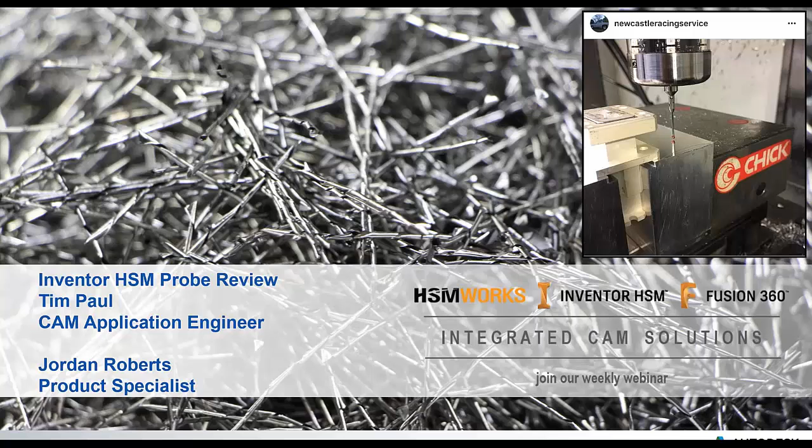We're going to be covering the Renishaw probe inside of HSM technology.

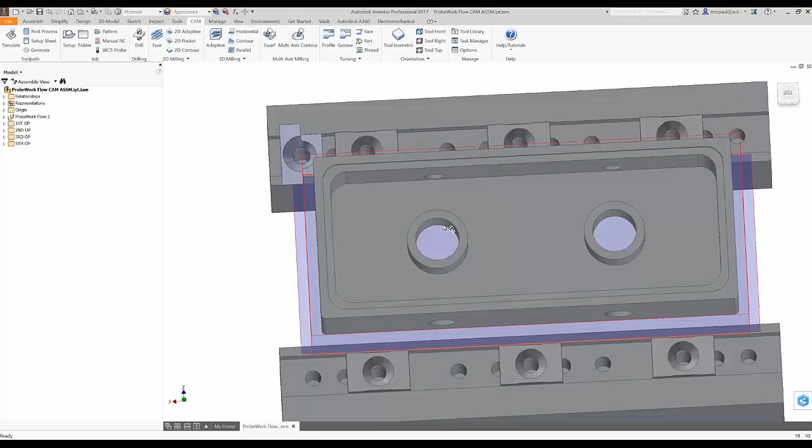So what we have here is some Mitee-Bite Talon vices that are going to hold it for a first operation. And then we're going to machine it from this perspective. And these through holes here have a pretty tight tolerance. You can fill in the blank for the tolerance for what is tight to you. Let's say we had a plus or minus 1 tolerance here, but the outside of the housing has something like a plus or minus 10 thousandths.

My hope today is really kind of just show you a workflow, not really tell you how to make parts, but share a workflow that I've used successfully. Hopefully you'll get 1 or 2 things out of this.

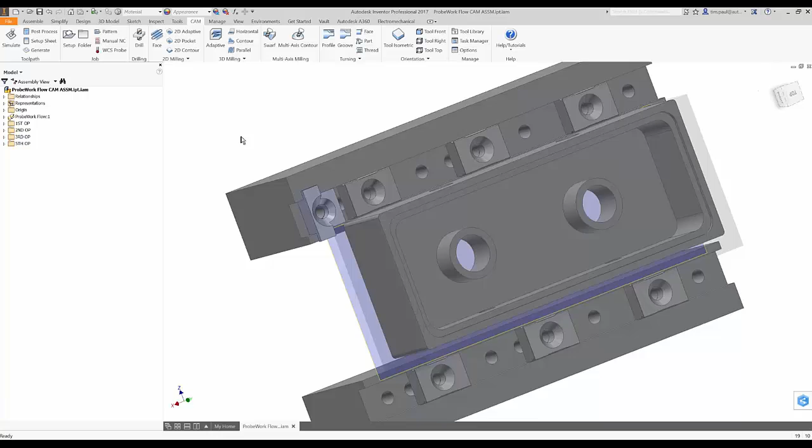So if we looked at this part and said the outside of the housing could have a plus or minus 10 or 20 or whatever you would consider a loose tolerance, I see a lot of people spend a lot of time keeping the outside of a housing like this super tight tolerance, because they know that's how they're going to index the part through the rest of the machining process. Because let's say these side holes had a super tight tolerance to the sides here or something like that. So I'll walk you through that, but then we're going to flip-flop the part around and show you how we do some of the probing.

So let's get back over to this CAM space. And actually I'm going to turn off the visibility on the model. So what I did here in the model space is I just have some fixtures that I can turn the visibility off for this whole folder and turn it on for another operation. So I'm not here to show you about the CAD, but in Inventor, this is something I use pretty often, is I'll turn on the visibility of one setup, turn it off for another. Some people will model up their whole table or whole vise, which is great. My focus is just to get a good representation of what I'm worried about touching.

So let's go over to our first operation. So I pre-programmed this, and we're going to go through a new setup for the first operation. I'll show you what we did inside this operation and how to work through it, and then we'll go from there. So we're going to make this our default folder. So if you don't know how to do that with your keyboard, you'd hit Shift D to make this our active folder.

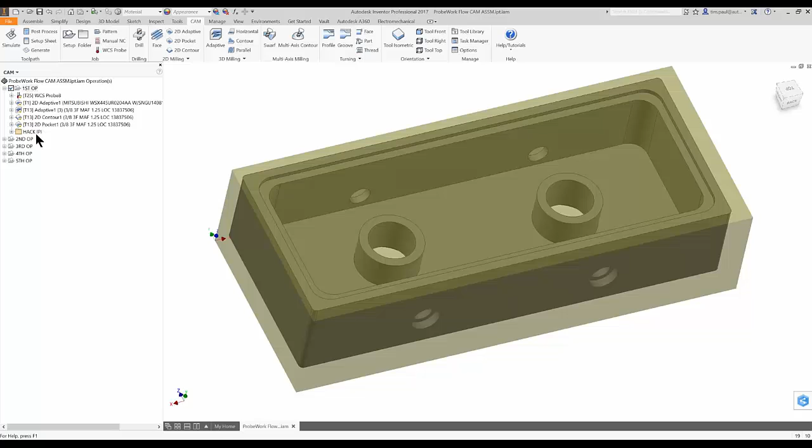So let's actually start off with a new setup. So what we're going to do is we're going to replicate this setup here, which is going to start with a probe of the X and Y, and then kind of work through some toolpaths. So for now, let's just do a new setup. So we have a new setup here. First thing I would do, knowing there's a bunch of hidden assemblies, I want to make sure that the only thing I'm grabbing is just the part I want to machine. So I'm going to clear the selection and reselect the model.

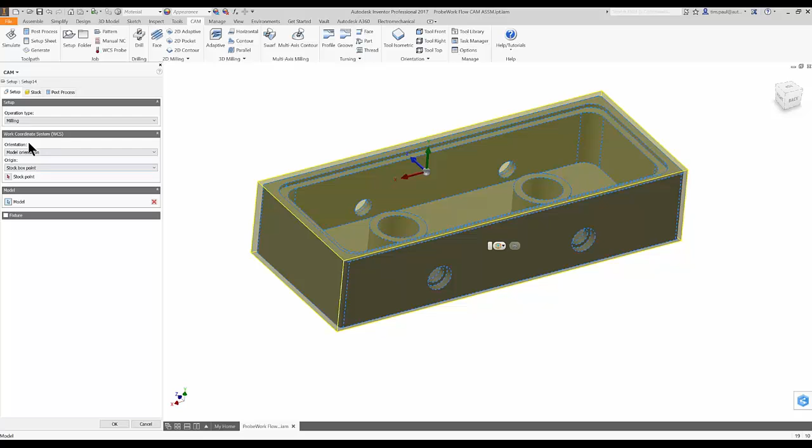Normally from here I would set up my work coordinate system, but for this I already have a solid set up for my stock. I'll explain why in a minute. But I'm going to jump back over to model. I'm going to open my first operation folder and grab the stock from there. So now we'll go back to the CAM, and now it's time to set up our work coordinate system.

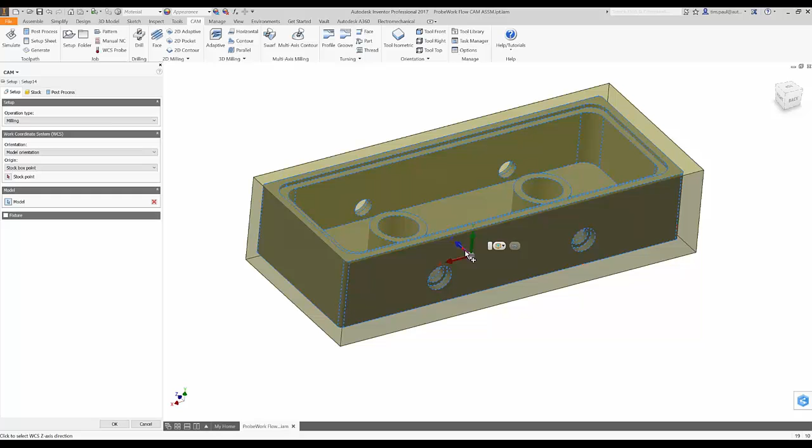So what I'm going to do is I'm going to grab the stem of the z-axis. I'm going to make it normal to one of the Z surfaces. And then my work coordinate system is going to be down in this lower left corner, so I want to click on the X there and flip it around. So now I want to move it, so I'm going to hover over the little ball here and just click it right there. So we're almost done with the setup.

So now we want to go to the Post tab. This is where I would give it a program number, and this is where I would call it something like first op. So today we're going to be talking about just probing with work coordinate system shifting. So for now we're going to leave the work coordinate offset and the override the same. If we have time later, we can talk about how you might use this, but this also might be changing. So for the most part, you're going to leave these the same.

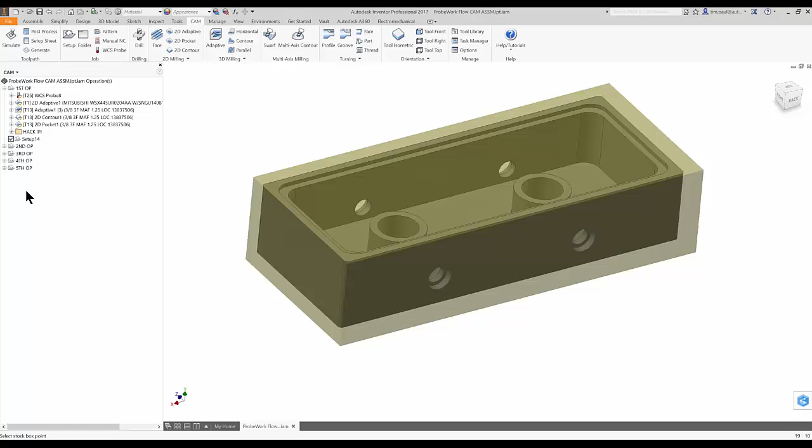So our job's ready to set up. Let's just drag this down so we can work on it down there. So the first thing we did here was do the probe there and there. So what I want to do is go back to the model space and turn on this folder, the visibility of all the parts. Sorry. So we can come back over to the CAM tab.

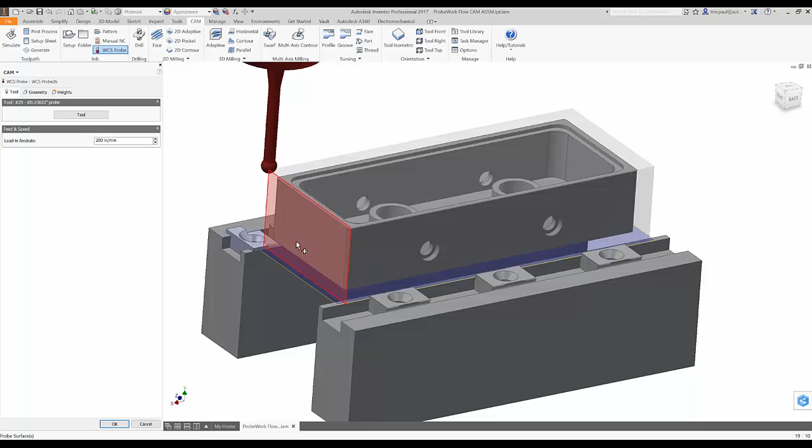So the first thing I want to do is an X and Y, what I call a web probe. So I'm going to right click here and go New Operation, Probing, and Work Coordinate System Probe. So we could definitely pick different surfaces, but we could also just pick the top surface of our stock, and it'll automatically probe basically a boss or a square boss or an X and Y web.

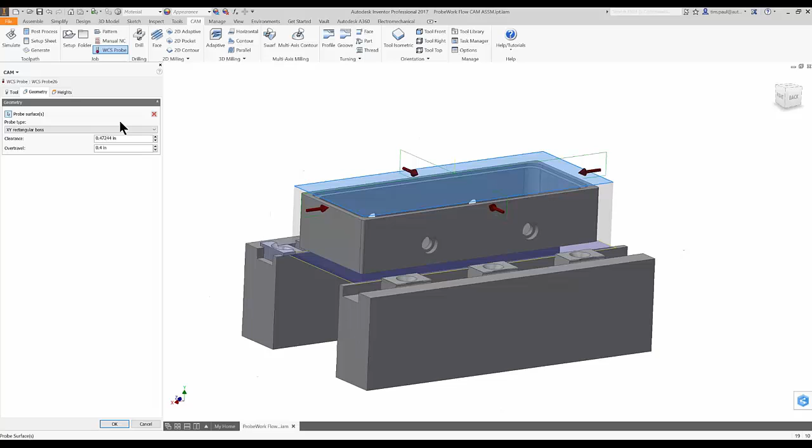So the first thing I see here that I don't like is that my rapid down to plane is pretty low. And a good habit, in my opinion, is that your clearance height, which is the height that it rapids to before it turns on what I call a safe move, I think Renishaw calls it protected positioning or something like that, I like to set this to something that's bigger than my probe height. So now everything below this height is going to be in a safe move.

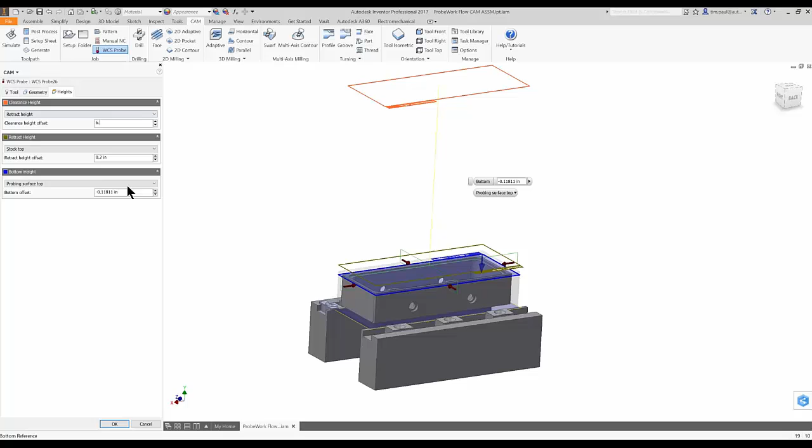So anything that touches the stylus, if it's not anticipated, so if I had a big bolt up here and it came down and touched it, as long as it touched the stylus and triggered the probe, it would stop safely. So we can just drag around the bottom height. So let's say we wanted to probe our stock in the middle instead of up at the top. We can do that. So that's our first probe location right there.

So what that's going to do is if I cut my stock a little bit bigger than what my intention was, if I left the work coordinate system located there, instead of machining around it and having a heavy cut over here and a normal or light cut over here, this is going to shift it. It's not going to move my work coordinate system, but it's going to shift it. So if I had 100 thou extra material there, or 10 thou, it's going to take half of it and shift it over, so you're going to have an even cut on both sides.

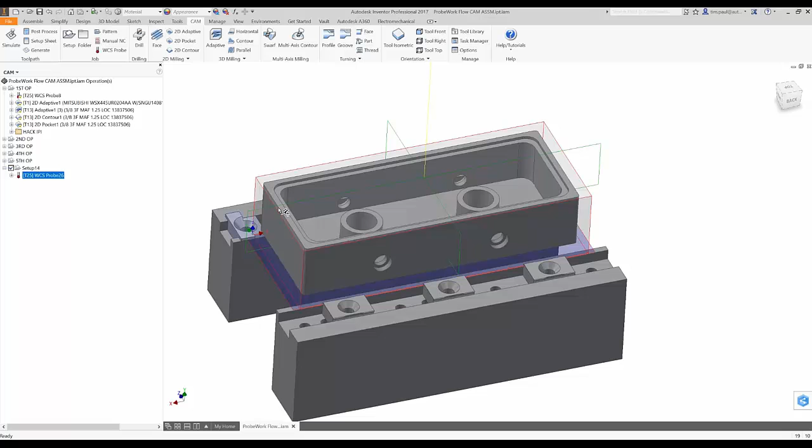Okay, so then the next thing I did was an adaptive facing operation there. We did a 3D adaptive to machine the inside and outside for rough. And then we finished these pockets and finished the outside with a 2D contour. And then we finished the walls and floors of these pockets, finished the tops of these resonator tubes. And then also, if you look, I finished the top of the part.

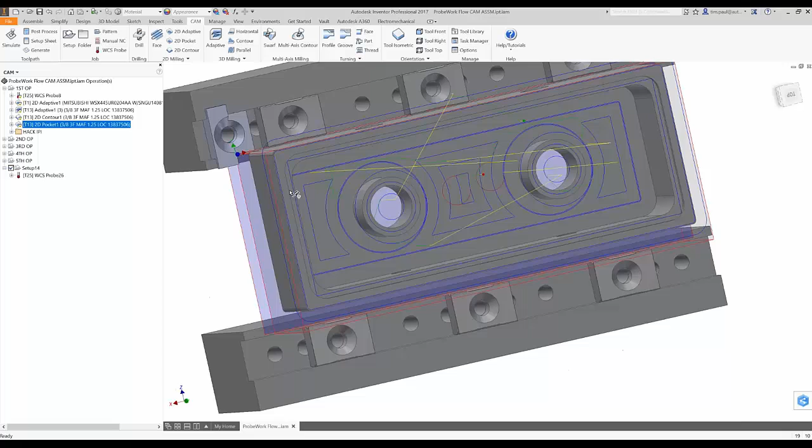Now the reason I did that with the same tool is I didn't leave a stock to leave on this toolpath. And I finished the top here because I know later these holes here have a very tight positional tolerance to this floor. But I can't probe that floor from this angle, but I can probe this surface here. So if I machine this floor and this top shelf with the same tool, I'll be able to pretty accurately locate those holes in that direction there.

So the first operation is done. We can copy these toolpaths and dump them in here if we wanted. You guys don't need me to show you toolpaths by this point. There's this hack folder here. If we have time at the end, I'm gonna show you some cool stuff that are kind of hacks for now, but they're still a pretty good workflow that I've used for years. So that pretty much summarizes the first operation. So that's how you would use a stock.

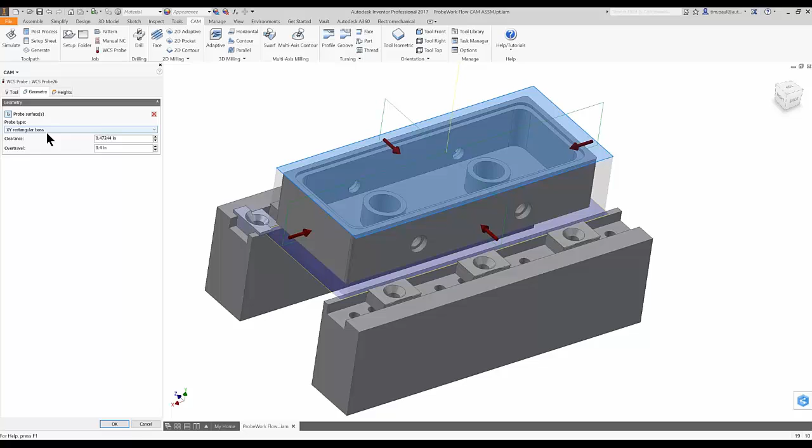Something that's important to note in our development builds. I'm going to write down to talk about development builds when we're done, because we just released a development build that in beta mode will have some stock probing functionality. It's still in beta, so it actually has a couple bugs to work out, but keep an eye on probing. In your options, you'll be able to do a stock probing. Okay, so let's move on. I'm going to delete this folder here.

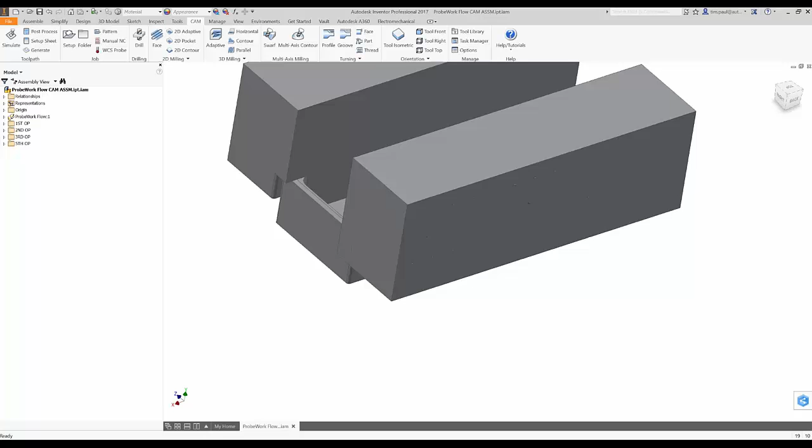Okay, so we're going to move on to the second operation. So I'm going to go to the Model tab and hide the, I'm not sure what I clicked there. Okay, get a little jumpy, so I'm going to hide the visibility of this. I'm going to show the visibility of my second operation, jaws. So this is my work setup for the second operation.

So the important thing to notice is on that first operation, I never really moved that G54 location. When I managed the L3 shop, Andy and I always had this one vise set up with those jaws on there. We had a quick lock so we could change the vises, but when the talons were on there, G54 never moved. I never reprobed it. I just kind of moved it around the way I just showed you.

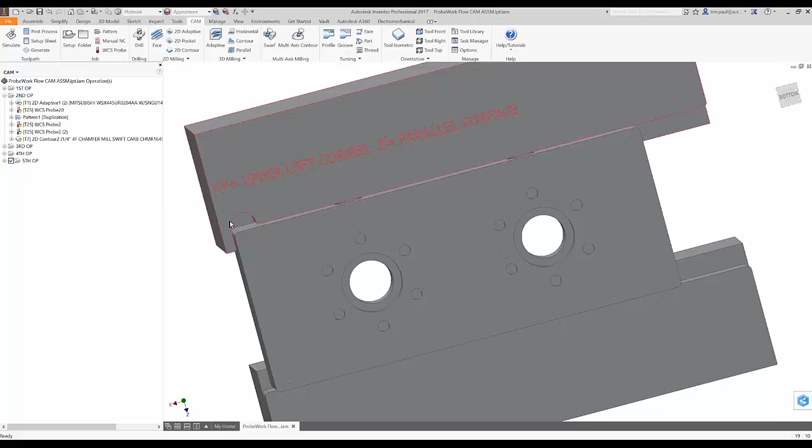But on my second job, or my second vise, I've got these jaws. So if you can see by my note, my XY0 is going to be on this surface here, and it's going to be against the stop. And then my Z surface is going to be on that parallel surface that indexes the part. So by doing that, we can finish the other 4 operations on this part without having to do a manual work coordinate setup each time.

So I put the jaws in, and on a Haas machine, I would use WIPS or whatever, however you locate your part. I would set up my work coordinate system to be that upper left corner, and I wouldn't change it for the rest of my programming. So if you click on the setup, you can see I have that work coordinate system there. But to get into the machining side of this, first thing I'd do is a facing operation there.

And then my engineer was rushed, so he didn't have much time to put much thought into the GD&T, so he made this counterbore some kind of ridiculous tolerance to the center of this through hole. And if you look at the first operation, I probably should have simulated it, but I'll simulate it in a little bit. This through hole I machined really just a little bit past this surface. So this hole wasn't exposed until I faced off that top carrier material. So now that this through hole is exposed, now I want to come in and probe it.

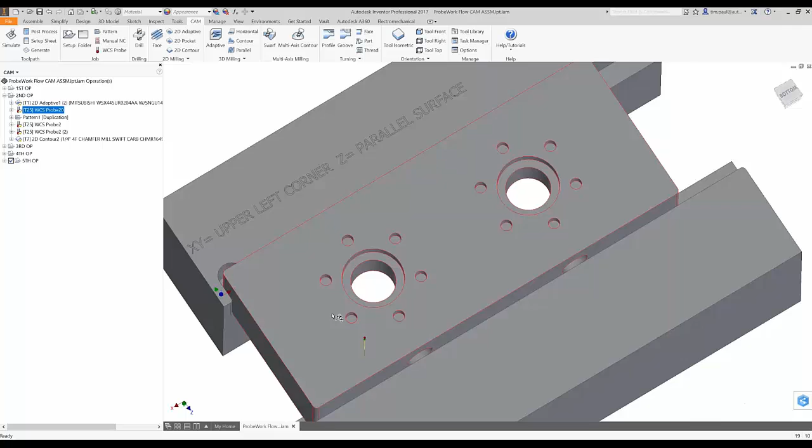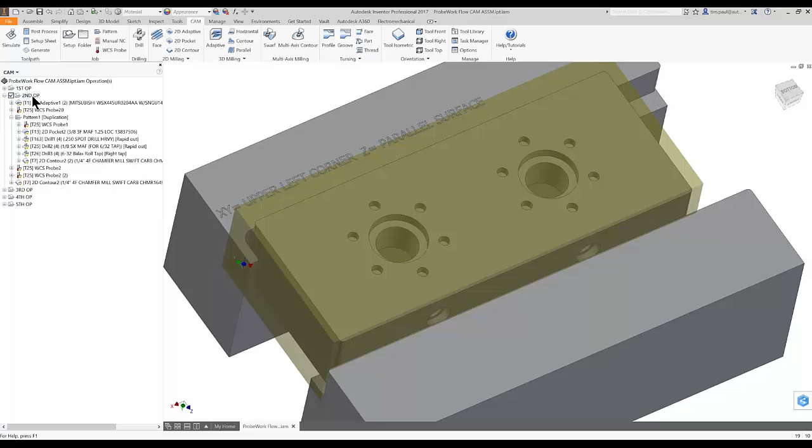Here, the first thing I do is a Z probe because the Z depth of this pocket is super important. So the next thing I did was probe that hole. So let's show you how I would Z probe this. So I'm going to switch over to make this my default folder. So I left click it, hold Shift and D. So now anything I add is going to add to the second operation.

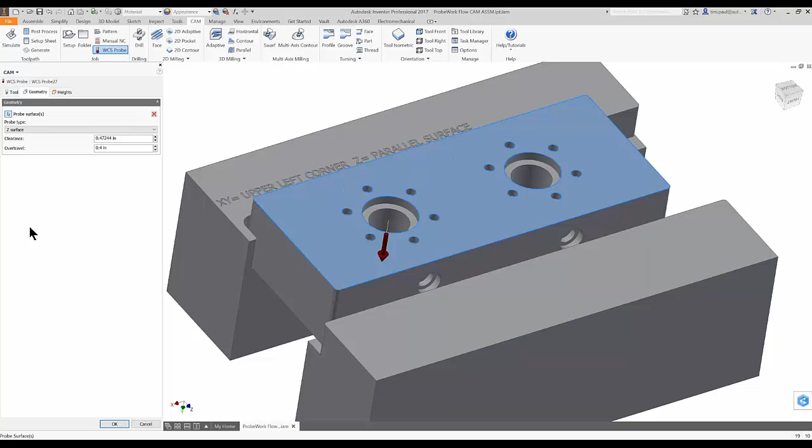I'll show you how easy it is to add a Z probe. So we'll just go here, click that top surface, and it'll probe right here. In the future, there'll probably be functionality to drag that around or add multiple Z strike locations. But for now, it's just going to put it in a good spot. So that's how I'd set up the Z probe. So we'll delete that because it's already done.

But then the next thing I need to do is shift my coordinate to where I'm definitely cutting concentric to this. So this talks about our outside housing tolerance again. So again, the print says the engineer had some foresight and gave me a big tolerance for the outside because he doesn't really care about the outside. He just cares about all the guts. So what he really cares about is that this counterbore is super concentric to this through hole.

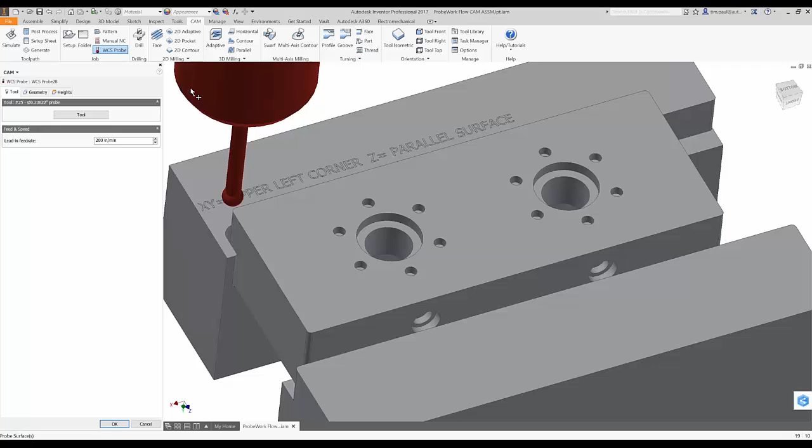So knowing that and the way he dimensioned it, I'm going to come in here, I'm going to machine it off and expose that hole, and I'm going to do a bore probe. So I'll show you how to do that now. So we'll right click here, new operation, and probing. Now, these are also available up here. I've got a habit of doing everything through the right click menu. So it'll automatically grab my probe because that was the last thing, and it might actually grab it just because it's a probing operation.

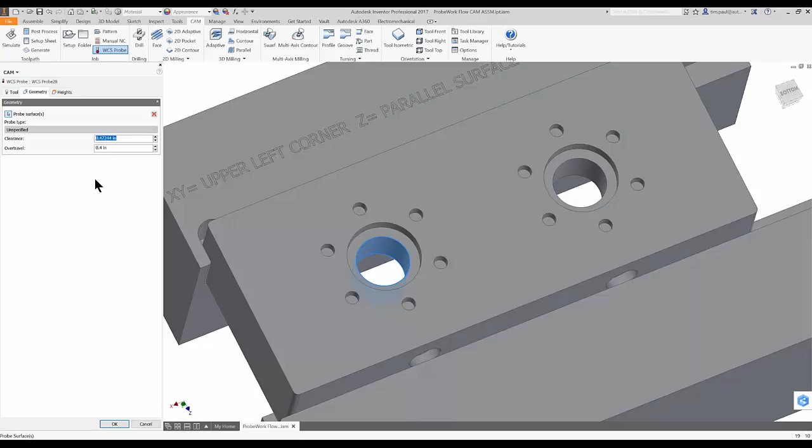So the next thing I do is grab that geometry, and you can see how you don't get a preview of any toolpath. So the reason for that is this hole, I believe, is about a ½ inch. My probe is 236 thousandths. So my clearance, which is the clearance between the probe and the wall, if you add the clearance and the probe up, it just can't fit in there, so it doesn't give you a probe preview.

So if I make that something smaller, say 100 thousandths, you can see it gives you a preview. It actually gives you a preview to also avoid an island. So if we go to this probe type, it gives you different options that you have based on the input that you've given it. So let's do a XY circular hole, because we're not trying to avoid an island. It can go in there and just bang around.

So the overtravel distance, I'm going to give you a resource here in a few minutes about where you can learn more about what all these features do from the Renishaw manual. But for right now, the overtravel distance is the distance it's willing to go past what it thinks that hole size is. So 400 thousandths is quite a bit, but that's a general Renishaw default, I believe. It's right around 10 millimeters.

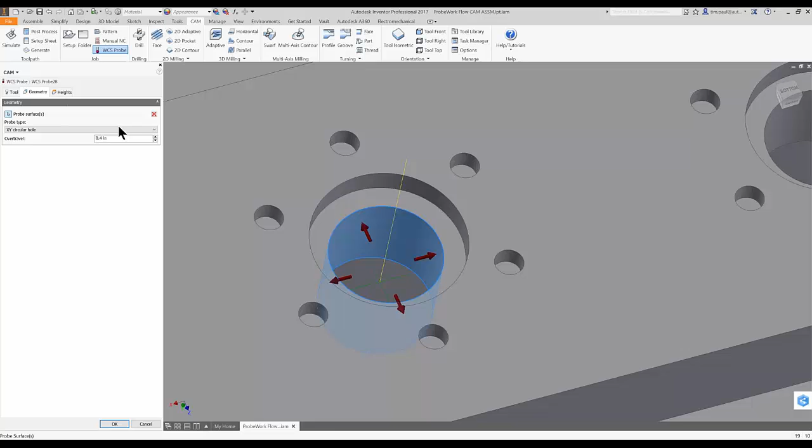So for now, we have that, and we can definitely go in and change the heights to probe at a different location. So again, this top height is where you start moving in a safe mode. And then the other important height is the bottom height, and that's where the strike point's going to be. So we'll hit OK. So now you have a bore probe.

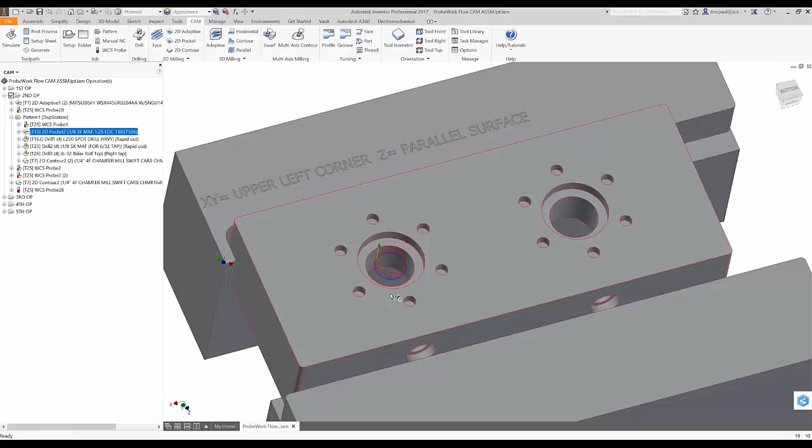So the important thing to know there is, like I said, if we use the 10 thou, say we were positive 10 thou on the outside of this housing, then that hole is going to be shifted 5 thou if my math is right. So if we came in here and used that original location, our concentricity is going to have an issue. So what this does is it's just going to shift it so that when you go to machine this tool operation, the concentricity is going to be as accurate as you set up your probe and as accurate as your machine is.

There's a whole other conversation about the validity, I guess, of doing your own inspections on the machine that cut the part, but if we have time, we can talk about that later. So as you can see here, I probed this. I bored the pocket, and I spot drilled, and tapped, of course using the template I already had set up. And then I did some chamfering there and there.

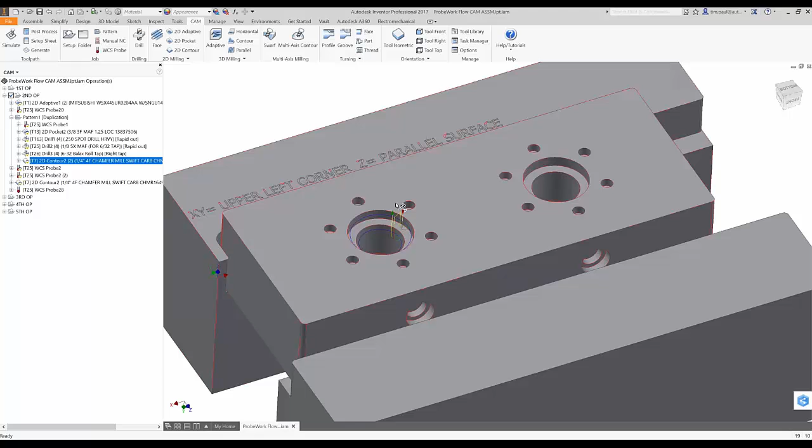You might ask why I didn't do that for both of these. Realistically, just probing this hole would probably have given me a very accurate alignment to both of these, but for whatever reason I had a chip or something, I saw the print and the engineer wants it dead concentric to that hole. So instead of repeating all these toolpaths again below that, which would have been a totally valid way of doing it, you could have copied and pasted, I highlighted all of them, right-clicked on them, and then did add new pattern.

And then I got this pattern folder here. So I'll give you an idea of what we did in the pattern folder. There's a couple details that are important. I did a duplication pattern, and that brought up this. So I picked the source, this edge, because that's the source of where I want all my toolpaths to be patterned. And I picked the target, the same edge over here, and just patterned everything over.

So the important thing to know is the default for this pattern is going to be order by tool. I think it's a good default because usually your intent is to save tool changes, right? So it's going to do everything it can with this tool without doing an operation ahead of itself that's going to kind of kill it. Everything it can, it'll sort the tools. My intent is to preserve the order because I want it to probe, bore, spot drill, and so on, and then come over here and do it again. Probe, spot drill, do all that. So it's an important little detail there.

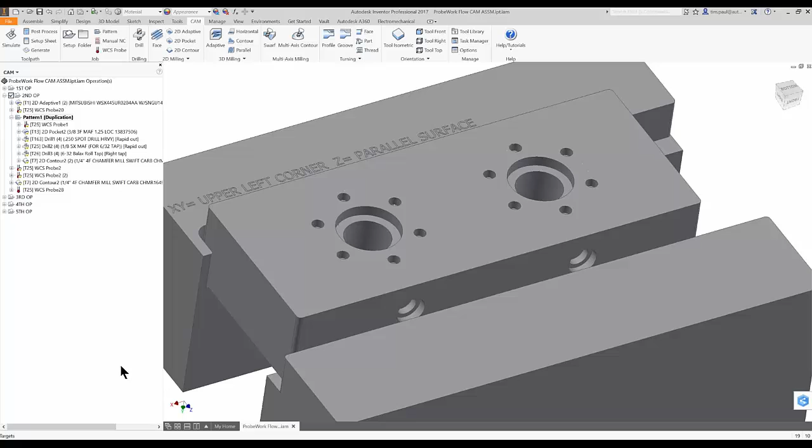But now when I click on that pattern, it shows you the toolpath on both of them. So we'll shrink that folder and then see what else I was doing here.

Okay, so the next thing I did was I had to chamfer the outside of this. I know a lot of guys on this call make what I would call cosmetic parts, but even if it's not a cosmetic part, let's say the engineer said he wanted a 5 thou chamfer around this edge. But remember, it gave me a 10 thousandths tolerance on the outside of that, and I like to use all my tolerance. So if this was 10 thou bigger and the whole part was shifted over by 5 thou, you'd get a little chamfer here, a big chamfer there.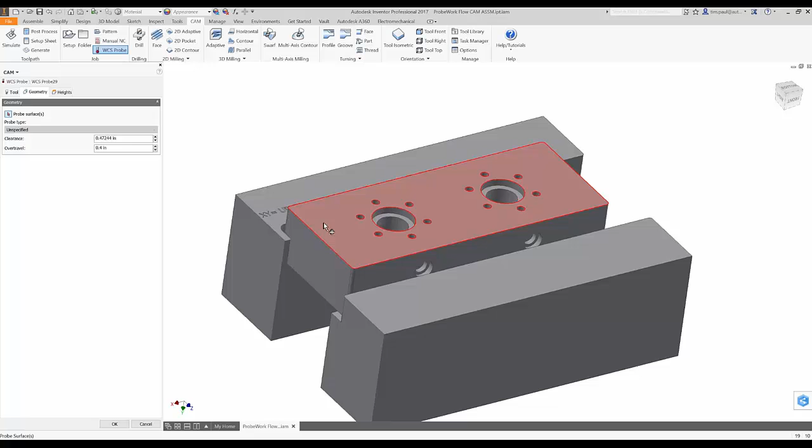So what I did was I probed the X and then I probed the Y. I brought this up because if we do a new probing operation, if we pick that surface, it has other features, so it's not as intelligent as it was when I did the stock. The stock had no other features, so it snapped to the outside. So here you want to pick this surface, and you want to pick this surface. It's smart enough to jump in between. You can adjust the heights if you wanted, and you would hit OK.

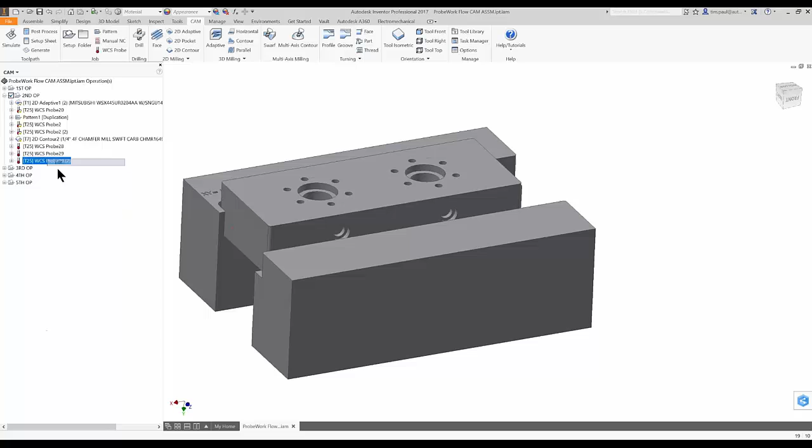My workflow would be to take that, left-click it, hit Control-D to duplicate. Any of those little shortcuts are all listed on this side here. So I basically want that exact same toolpath, but I want it here and here. So I want a Y. Oops, I deselected that. So I want a Y web probe. So I hit OK. So that's how I got those two. And then what I did after that was a chamfer around there. So my chamfer should be very accurate to the center of the outside feature.

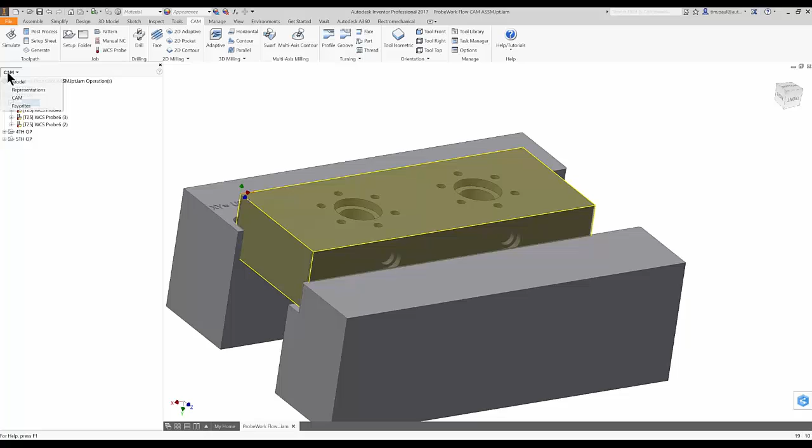So let's delete this. Now we're ready for the third operation. So you can see I didn't have to manually probe anything after that first setup when I was setting up the machine. So now when we move back to the third operation, hit Shift-D, make this our default folder, and we'll expand it. And then let's go over to the model, and I'll show you how I did that.

So on the model, I'm going to turn off the visibility for this, turn off the visibility for this, and turn on the visibility for this. So now you can see how I'm holding it here. So let's go back over to the CAM. I don't need to walk you through the toolpaths on this, but I do want to talk about how I set it up and why I set it up the way I set it up.

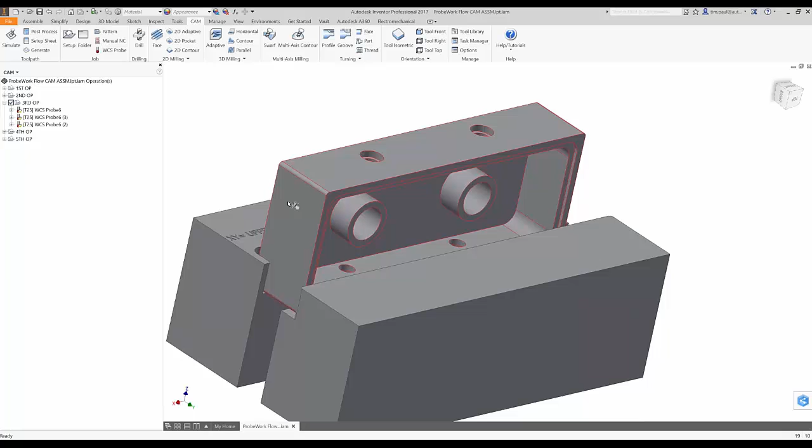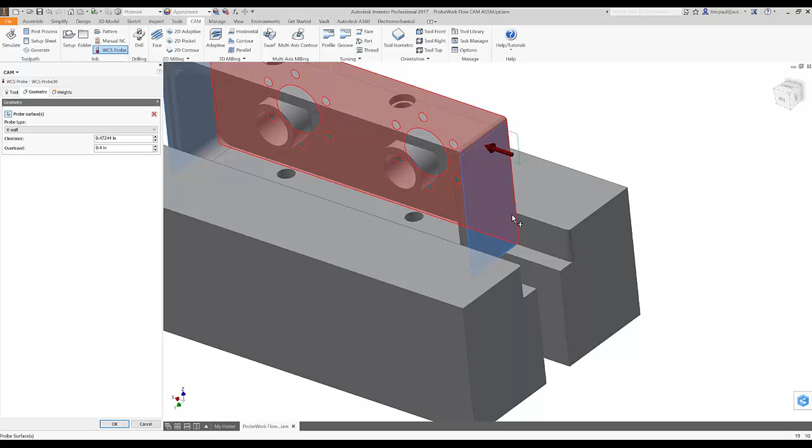So the first thing I did was, if you look at the print, this is set up based on these two features' center line. So I did a new probing operation, and I wanted to just hit it here and here. That's going to probe it and shift it. Anything this is off, it's going to shift it to where now it's machining to the center of that. The other thing that's important that I mentioned earlier was that the engineer dimensioned these with a true position to this floor. I don't have any way to probe that right now. So the way I machined this surface here was very tightly toleranced to the floor. I used the same tool, same operation. It's basically as accurate as your tooling and your machine's going to be.

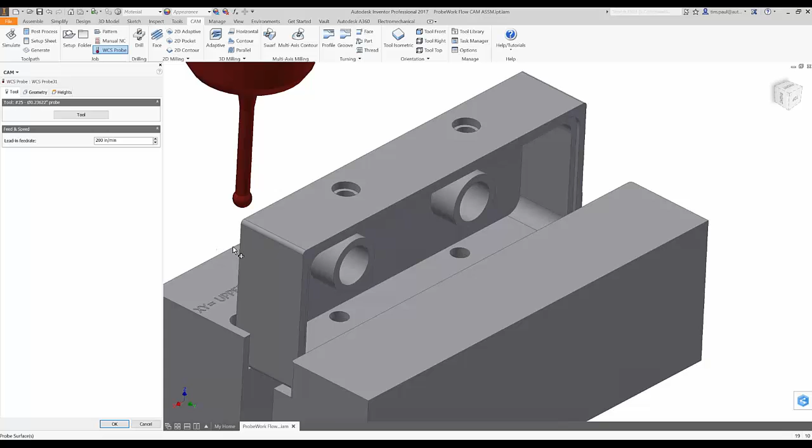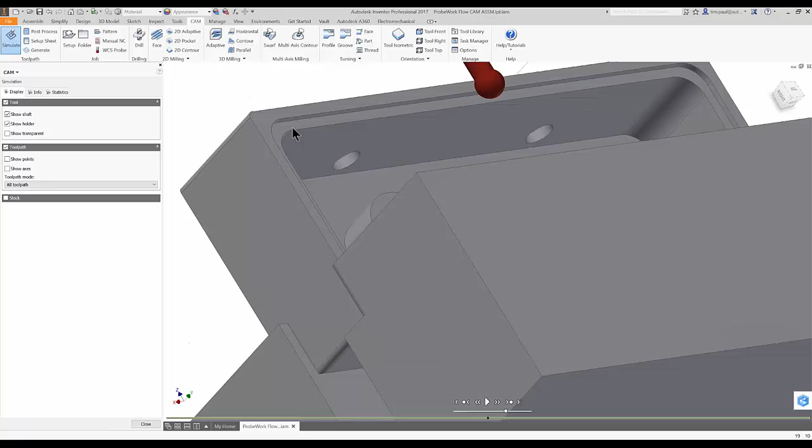So what I did here was I probed the Y surface, and I'll show you how to do that. So new operation, work coordinate system probe, and I clicked here. That's when it's going to come in and strike that surface there. It's probably important to note that if you go simulate, you can click on that little thing there and it'll show you where it's going to strike. Now, it might look odd because it's below this edge, but I didn't machine that pocket on the first operation. That's something we'll be doing here in a second.

If I wanted, I could definitely go to heights, and I could drag the height around. I could raise it up or down a little bit if I wanted. But for now, I know it's good, so I'm going to leave it alone. So we'll delete that to remove the clutter.

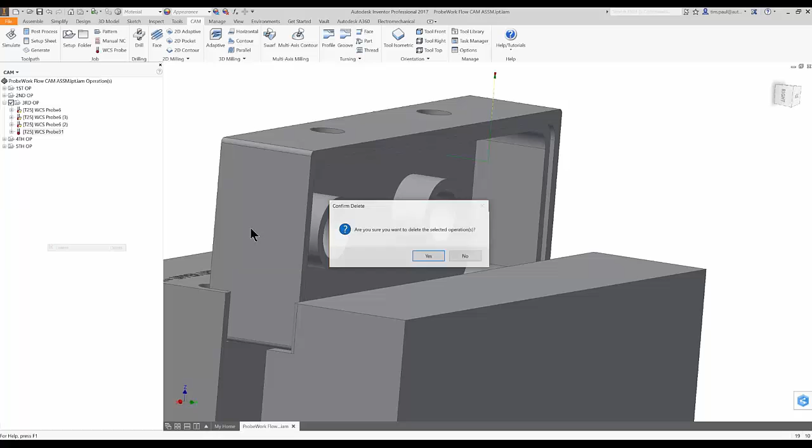And the last thing I did was a Z probe. Of course the engineer wants this, from this surface, to be plus or minus nothing basically. And remember, I used the whole tolerance, the plus 10 thousandths here, so if I left my work coordinate system there without shifting it, it would have messed me up. So same thing, I'll do it again. Just do new probing, and I just pick that surface and it's going to probe that location over there. So pretty simple.

But the key is to remember that it's just shifting. So if this is supposed to be 2 inches and the measurement from here to here was 2 inch 10 thou, but still barely within spec, it's going to shift it up 10 thou, so these features are now machined accurately. Okay.

So sorry about a little bit of background noise.

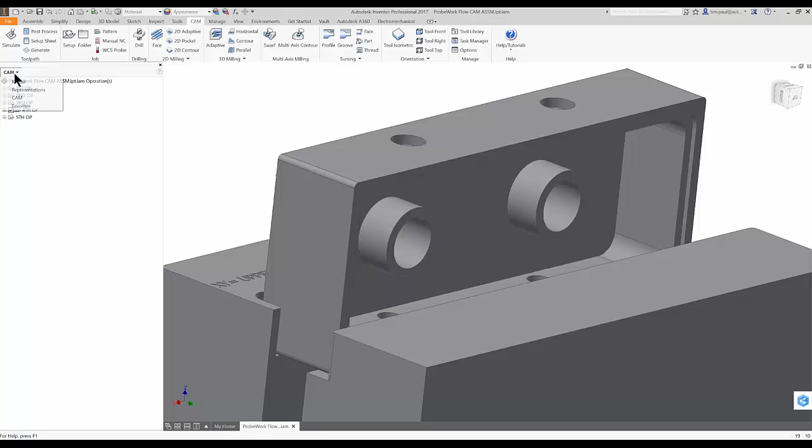So we're going to make this our default folder. I'm going to go over to the Model tab. Actually, the 4th operation I don't need to go over because it's essentially the same as the 3rd operation. So we'll show the visibility of the 5th operation here, and then we'll turn off the visibility of the 3rd operation. Okay, so we got model.

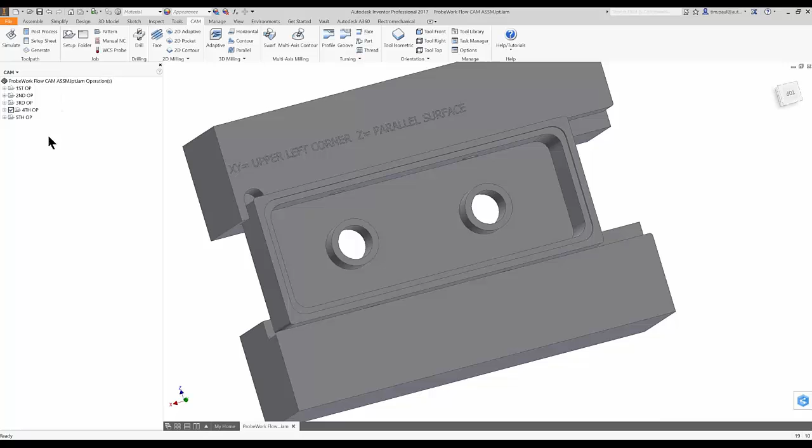We're going to go back to CAM. And let's make this our default. So again, I'm going to hit left click, Shift D. We'll turn on that folder, and I'll tell you what's happening here first. So remember, we still haven't had to manually probe this vise because it's just flipping the part over. We keep that work coordinate in the same position.

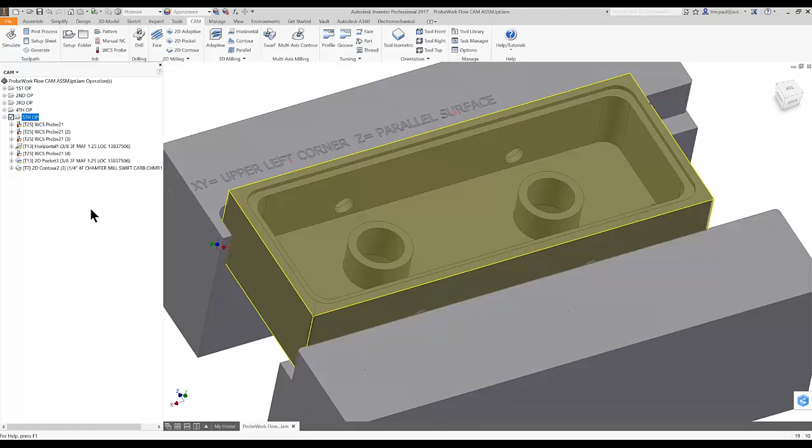And then a little story about what's happening here is this is similar to my last job. We made a lot of very, very high tolerance microwave housings, not much dissimilar than this. So if we machine this on the 1st operation, we would not machine this pocket here. It would go out, be gold plated, spend a bunch of money doing that, and somebody would work in here and do all kinds of magic for days and days.

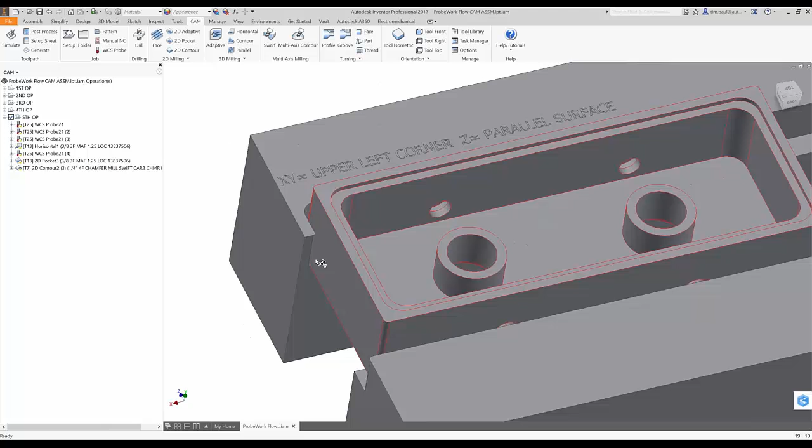And then once it was working the way they wanted, they'd come back into the machine shop and want us to machine this pocket here so they could put a laser welded lid on there. So the step here is super tight toleranced. They would want me to machine off this surface here so it's raw aluminum, and machine a very tightly toleranced surface there. So we'll show you how I would work through that.

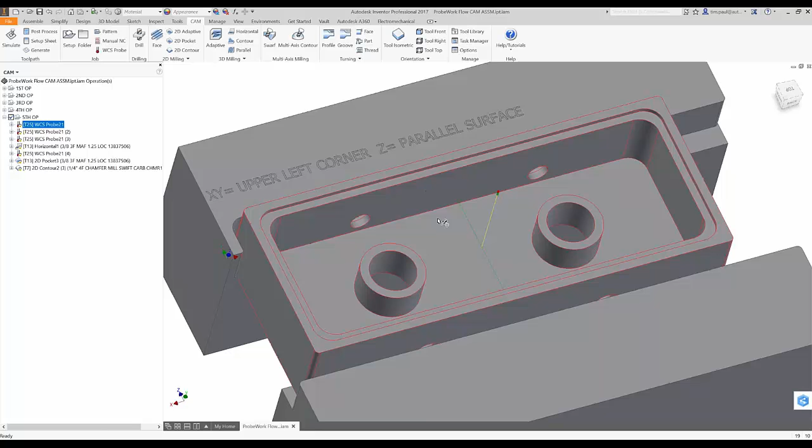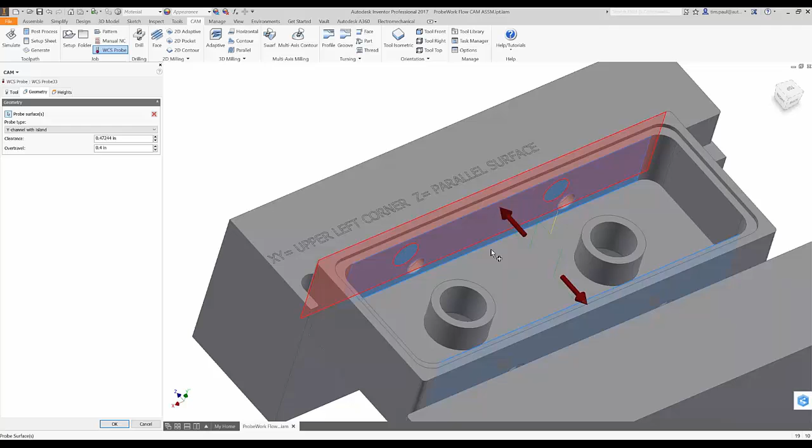The location tolerance is super important too. So the first thing that we would do is a Y channel. So we'd do a new operation, probing, do a work coordinate system, and we're just going to pick these 2 surfaces here. You can see the default wants to default everything to going over an island. So we have this option here to do a Y channel. It's going to come down here and just bang back and forth and get the center there.

So again, it's just shifting the work coordinate system. If this isn't where it knows it should be in the perfect world of CAD, it shifts it over, so now your new lid is going to be perfectly centered. So after I did that, I would do Control D to duplicate that toolpath because I want to do the same thing, just left to right through the X. So I'll cancel my selections. I'll click here, and there, and now I do want to use X channel with island probing.

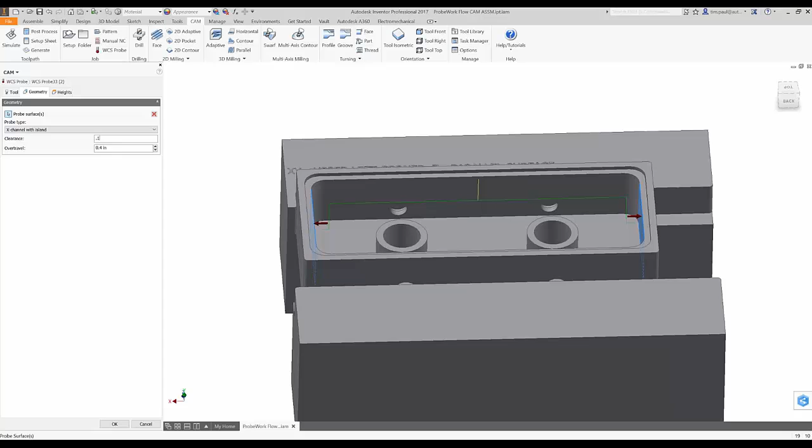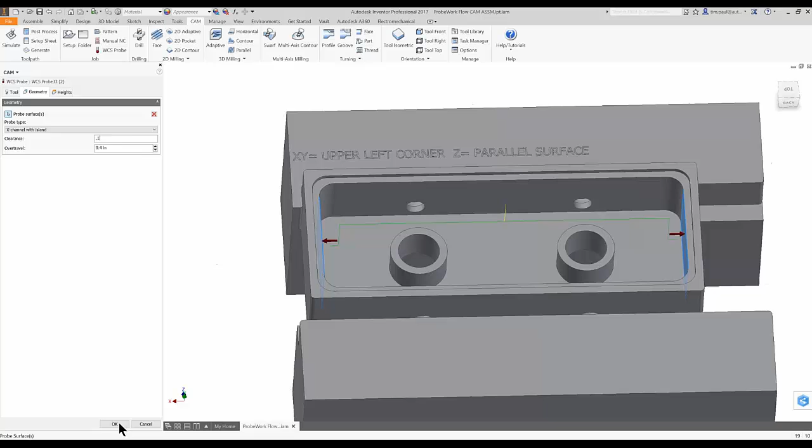Now, if I wanted, I could get a little further away from those resonator tubes and go 100 thousandths. This clearance is kind of important. I'm confident that my operator is putting this thing in there well within 100 thousandths, so it's basically giving it a clearance. If there was a chip in here or whatever, it's going to account for it and shift it over to where now you're machining on center. So we'll hit OK, and we'll get an X channel probe that goes up and over the islands.

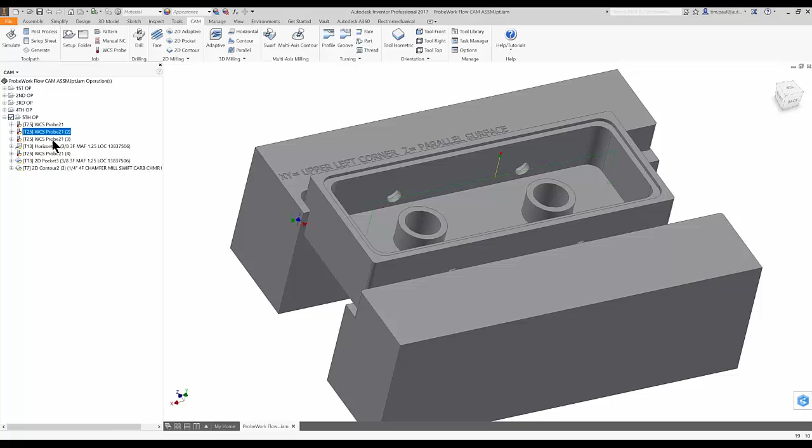So I'm going to delete those. I'll show you how I walk through this. So we did the Y channel probe, the X channel probe with islands, and I also did a Z probe here, and then the next thing I did was machine off that surface. So I could manually lower it in the machine to where it took off the half thou of gold plating, or more realistically, probably 3 tenths or something like that.

So after I machined it, I probed it again, because the real tight tolerance is the step here. The engineer wants a very tight tolerance between those two. So I probed the Z again, machined the pocket, and then gave it a chamfer. So that's kind of the workflow that I would use with our current functionality.

If there's any questions about that, I kind of raced through it pretty quickly, but I encourage people to bang on it, play with it, and try it. If there's no questions, I have plenty to talk about, but it's going to be more about probing in general, some other advice. Any questions, anybody? Wayne or Jordan, do they have any? I'm happy to move on to some other stuff.

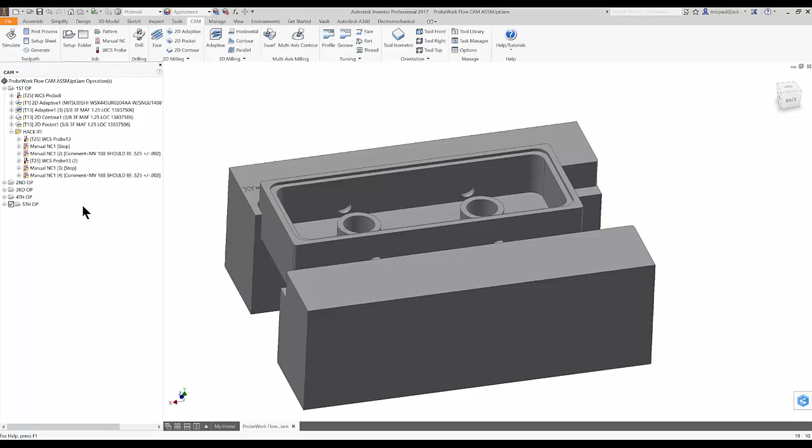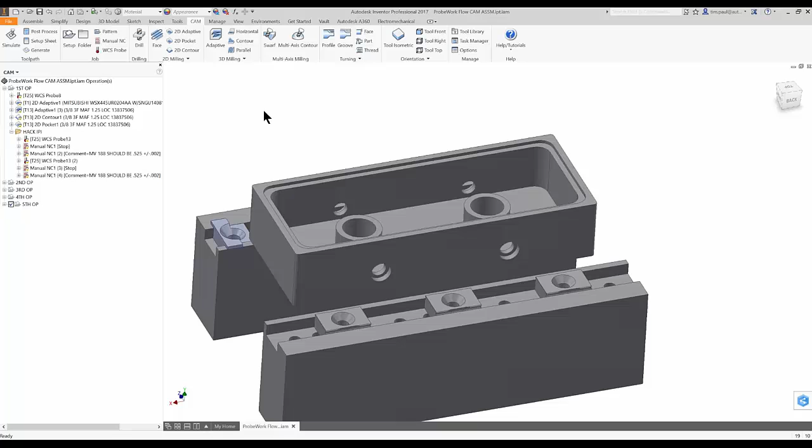So let's go back to model, and we're going to turn on the visibility of that, turn off the visibility of that. So back to the first operation. I'm going to hide the visibility of the stock. And let me show you kind of what I would do here. My engineer really cares about the ID and OD tolerance of this. It's ±1 or ± whatever seems tight to you. So I'll show you how I would work through that.

So I'm going to use Shift-E to make this my default folder. And what I want to do is I want to come in and probe it. And something's important to know. I'm going to pull up my PowerPoint real quick to explain a Haas hack, and then we'll go back to the model. We'll go over this stuff in a second, and we'll fast forward to this Haas hack.

So this is a screenshot from the VM3 Haas machine that's at L3 Communications right now. So if you go to your operation timers and setup page, I'm really giving you a how-to. If I race through it and you don't pick it up, get a hold of your HFO, and they can help you work through this. On the operation timers and setup page, normally you'll see something that says, I believe, label 1 and label 2, where it says 1 and 2 here.

And in the 3 and 4 location, that's where label 1, I think it defaults to 0. But what's happening is this is a macro variable, and I think we have enough time to go over that in a minute as well. Macro variable 188: if you come down to probe a bore or a boss or really any feature, it also measures the size, does some math, and all kinds of stuff in the background. That size is referenced from macro variable 188. So if you probe a bore, it's going to dump that size to 188.

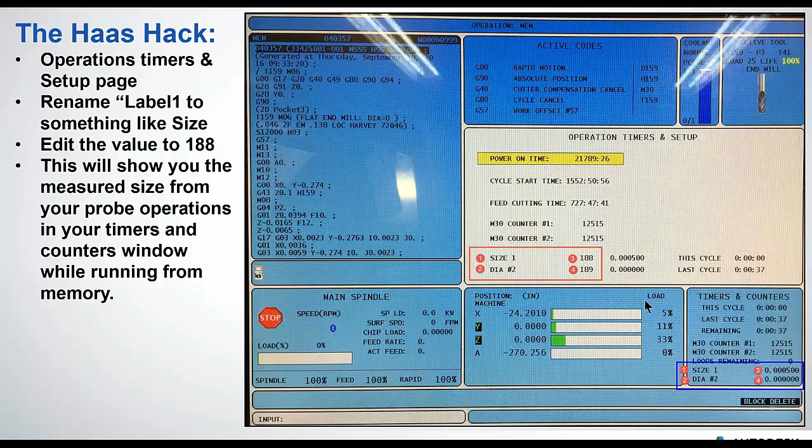It's a temporary dump, but if you change the label like I did at L3 to size 1, in your timers and counters while you're running through memory, you'll see it down here. So it's kind of a neat little hack. We're going to go back to the part now with that explained. So what I did here is I came in and did a bore probe. I already showed you how to do that.

But then the next thing is a manual. So if you guys don't know how to do manual operations, I just did a new manual NC. I did a stop, so it's going to pull up an M0. We'll post this out and we'll look at the code in just a minute. So that puts out a stop command. And then honestly, I would just do Control-D and duplicate it, right-click and edit. And then I would change that to a comment command.

And so this is kind of in-process inspection, so I called it a hack. We're moving towards the direction of having in-process inspections where you're going to be able to add logic and all kinds of cool stuff. But for now, I did an M0. So after I machined everything, I did an M0, came down, probed this, and this is where I would put a note for my operator.

So an M0 is going to pop up, stop the machine. I'm going to put some kind of note like macro variable 188 should be 525, and let's do plus or minus 1 or half a thou, whatever your note wants to be to the machinist. So I probed the bore, and then I added those two manual operations. So I'll delete those. I would have just duplicated them and then moved down from there.

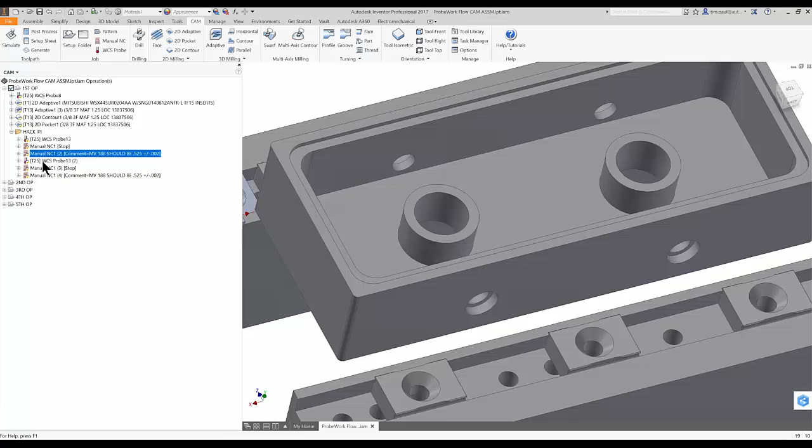So the operator is going to see that, and he's going to look at this on the control where it's going to say 526, and he's going to say that's fine. And he'll push go again. And in this case, we wanted to measure the bore, or the boss. I don't think I showed you how to do a boss. It's the same. So give me just a second here.

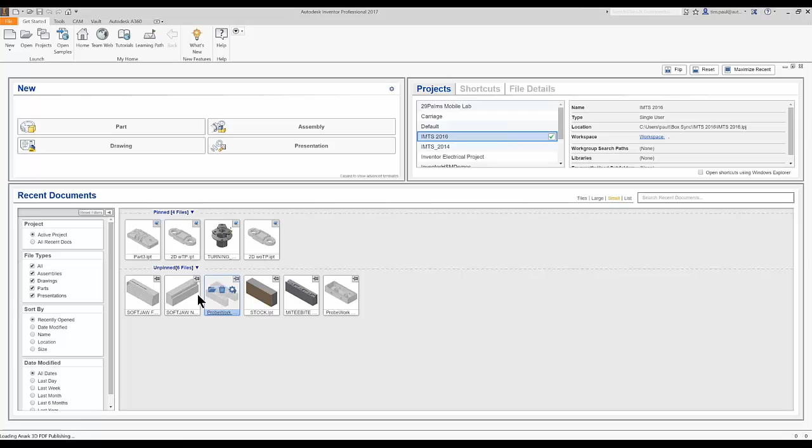Hey Tim, while you're doing that, just a couple questions that came in I want to make sure you have time for. Yeah. Make sure to show how to create a new probe tool type. I think we skipped over that. How to create a new probe? Yeah, how to create the actual probe tool in the library. Okay. And then there's quite a few people that would like to see an example of the outputted NC code. So yeah, that was what I was getting ready to do just now, and so we'll do that. I just scribbled down new probe type, and we'll circle back to that in just a second here.

So let's get back to this. So we're in the hacks. Let's look at the code real quick. So we're going to hit post. So in the latest Haas generic post, the probing functionality is live there. So post this out, and I'll drag it over and explain it. So first thing we did was, tool 25 came up. I hope you guys can see this, it's a little small. Tool 25 came up, and then it rapids down to this height.

And this is where that 6-inch height is nice, because if it rapids to something taller than your probe, if something is set up wrong, it's still going to be safe. And then it turns on this 9810, and I think I have enough time, we're going to show you that Renishaw manual. I don't think it's important that you really know all the macros, but it's nice, just like with G-code. I've since forgotten a lot of G-code, but I have a good understanding and overview of it. So 9810 is that protected safe mode movement. So from here to here, it's going to move at 200 inches a minute in a protected mode.

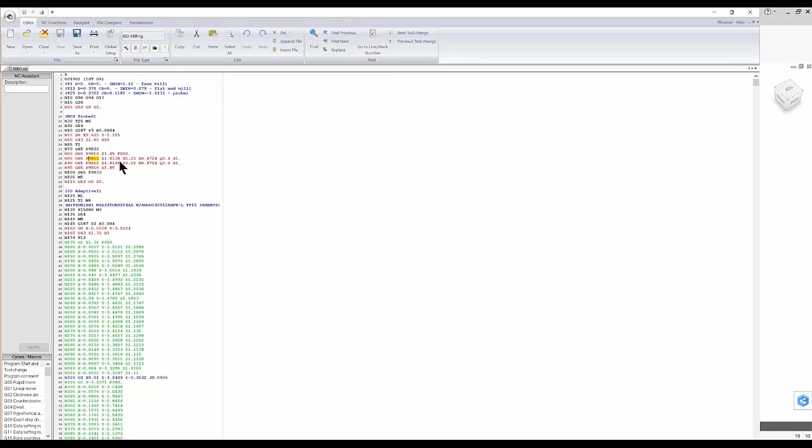So the feed rate that's important to talk about is, I know on a Haas SS series machine, 200 inches a minute is what it can move around, I believe. It's what it can move around safely and hit something that it didn't mean to and still stop without hurting anything. So the next move, it's going into a 9812 move, which is just to your blank. It's like a web, a dual surface web. And these are the functions in there that I'll show you in the manual, and you'll be able to decipher it from there if you want.

Then it's moving up in a safe mode, and then it goes into the next tool. I wanted to go down to the bottom to show you how that hack works. So what it would do is finish the program, pull up the probe the bore, and then this M0 would pop up and stop the machine, and then he would see a note right below it that would tell him what that size should be. If it was good, he'd hit OK. It would probe the next thing, stop, and give him another note.

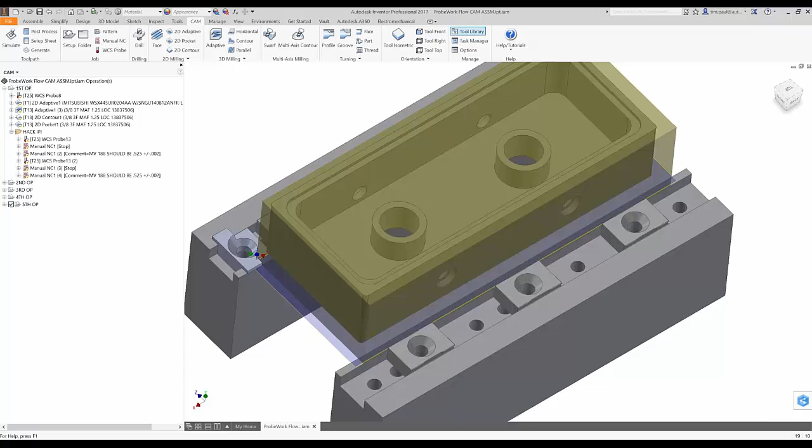So I think we're coming up on time a little bit, so I want to make sure to show you a couple resources. First one, I'll do what Al was asking for. So if we go to the tool library, you can see I defined this probe to be exactly what my OMP40 in my Haas machine is.

Tim, I think you're on the other screen. There we go. Was there a lag? Probably. Okay. Well, I thought you're on the other screen with your tool library. Oh, no. Can you see the tool library? So we can see it now.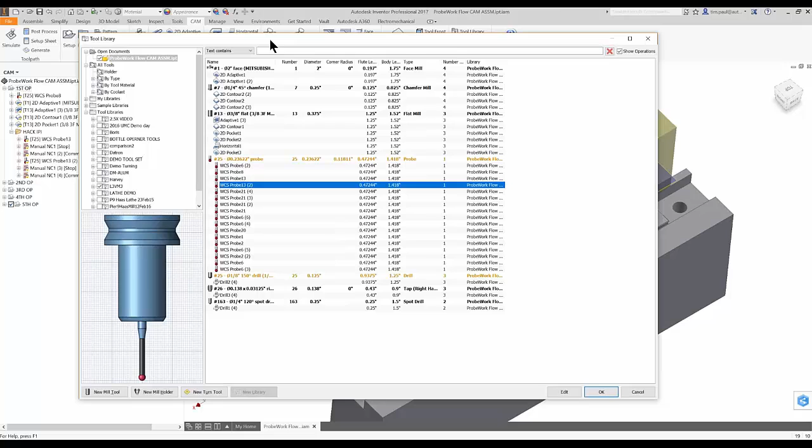Thank you. So if you look in sample libraries, I think CJ and Al or somebody magically put in a bunch of probes. This one here should be, you should double check it, but it should be a good representation of your OMP40 if that's what you have in a Haas machine. It's probably a good place to start with editing one if you want it as well.

So then I wanted to jump back over to this PowerPoint and show you a couple resources. It's what I call good to know stuff. So the Inspection Plus manual, I don't even save this locally. I just go to Google and do a search for Renishaw Inspection Plus Haas. And this is a really, really good manual to pull up. I think I might have shown that to you at the beginning. If I didn't, a couple pages that are nice to know: if you go to page 21, it's getting started. It explains a lot of stuff.

Page 34 is the variables. So this I mentioned earlier. So if you're probing a boss, this is a variable table. The size is output to variable 188. I didn't just know that, I found it here. It's a nice way to see where all your variables are going.

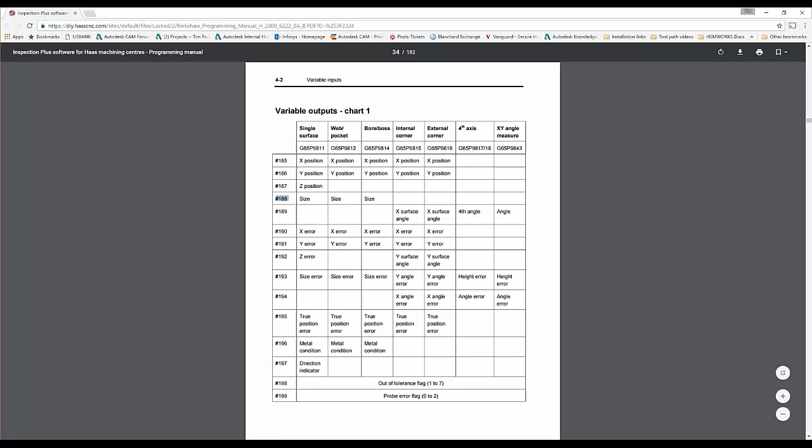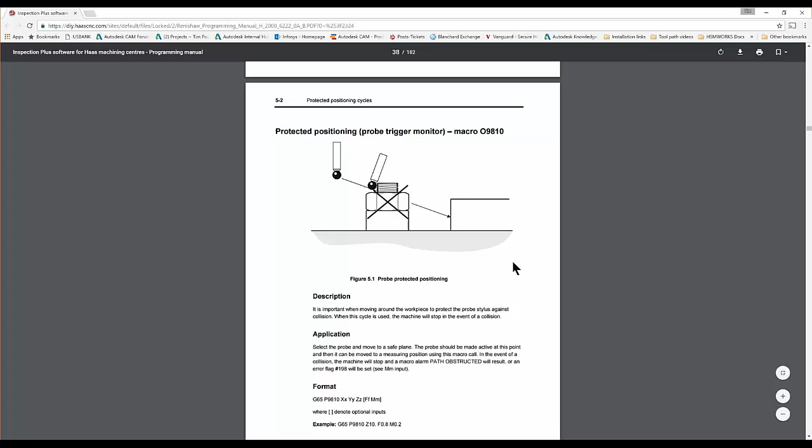So 38 I wanted to show you, so we'll just scroll down to that. And this is protected positioning move. It's that 9810 move I was telling you about. So this is how it works. It's super important to know that if it hits the body of your probe, it's not protected. It's all based on the trigger. So I've seen some people not understand why when they're bounced off their probe head. On that note, if for whatever reason you do crash your probe, they do have crash replacements for it, so you don't have to buy a new one.

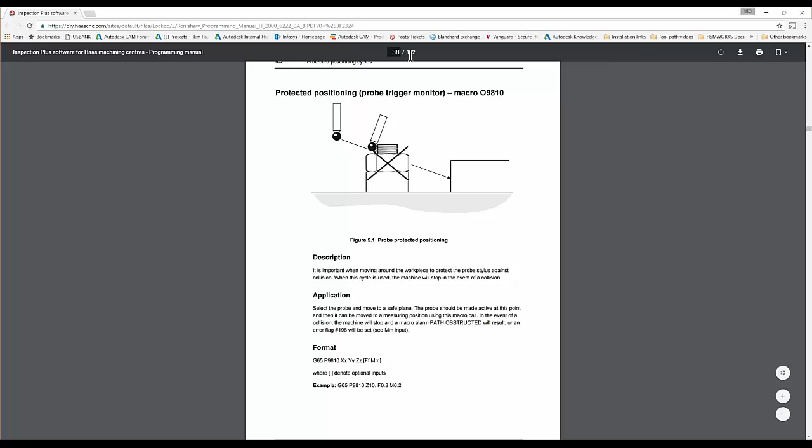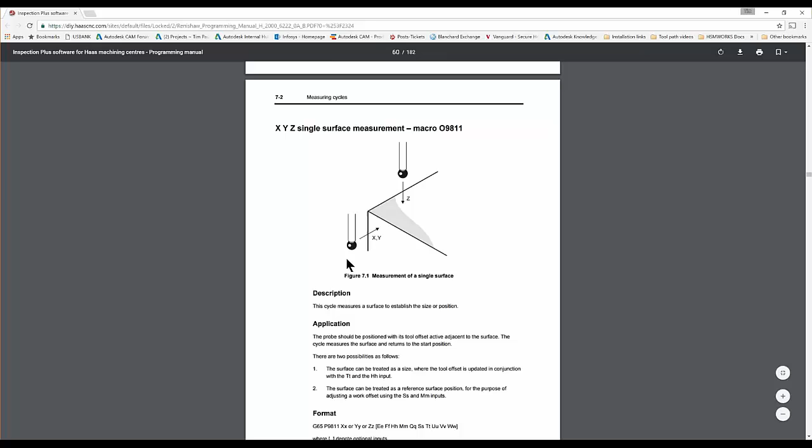But the last thing I want to do is show you page 59. I tell people you shouldn't have to know G code and macros and all that. But it's always nice to have an overview understanding of what it does. So on page 59, it's the measuring cycles. So these are the cycles that we're using in the background that you're seeing posted out. So 9811 is single surface, so anytime you're probing just one surface, Z, X, or Y.

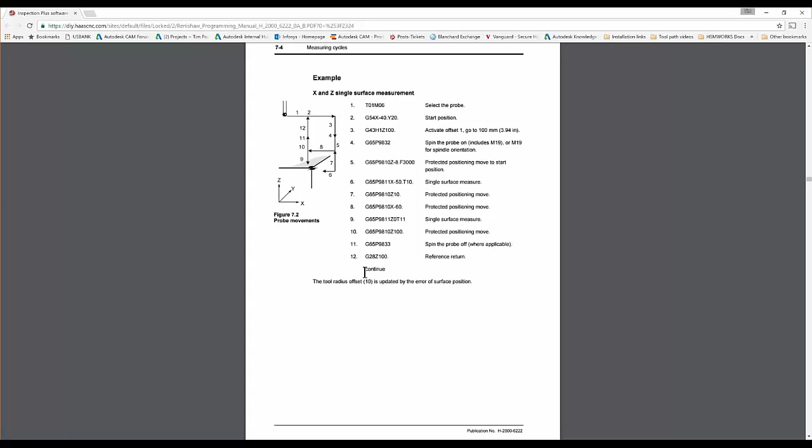But I encourage you to dig through the whole manual, and you'll see there's a ton of horsepower, a ton of functionality inside the Inspection Plus routines. And I think our goal, and Al can speak to this, is to add a lot of that functionality in HSM.

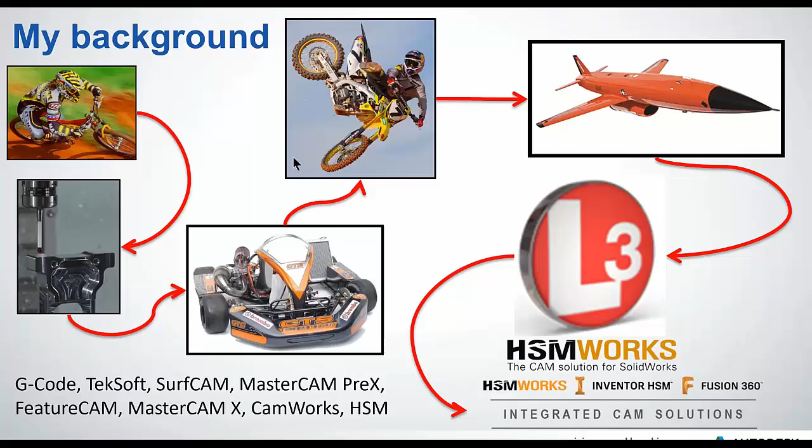So last little note: if you saw on my first slide, Andy from L3 sent me this picture or posted it on Instagram. Newcastle Racing Service. He posted this, and we use this a lot at L3. It was a pretty small little stylus. It's important to know that when you're changing your stylus, there's a deflection that you have to be aware of. So if you go to QMark's website, it's the one I've always used.

If you go to QMark's website, you can punch in all your stock values, and a little FYI, you need to find out what your probing force is. And on an OMP40 in a Haas machine, last time I checked, it was 50 grams. So if you're changing from your stock stylus to something else, understand how much the deflection difference is, so you know what you're doing there.

I know a lot of you have not seen a Renishaw probe in action outside of just manually jogging it around, so I thought I would show you this video. CJ's one of our team members. He and Angelo, a new team member of ours, are at our Pier 9 workshop, which is an amazing little workshop in San Francisco.

And they're banging on the software now pretty hard, so you should see functionality adding pretty quick and often. So, are there any other questions that I missed? Let's take a look here.

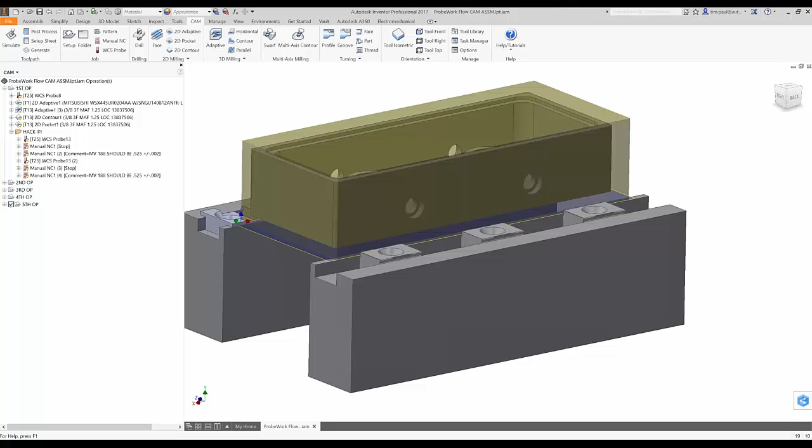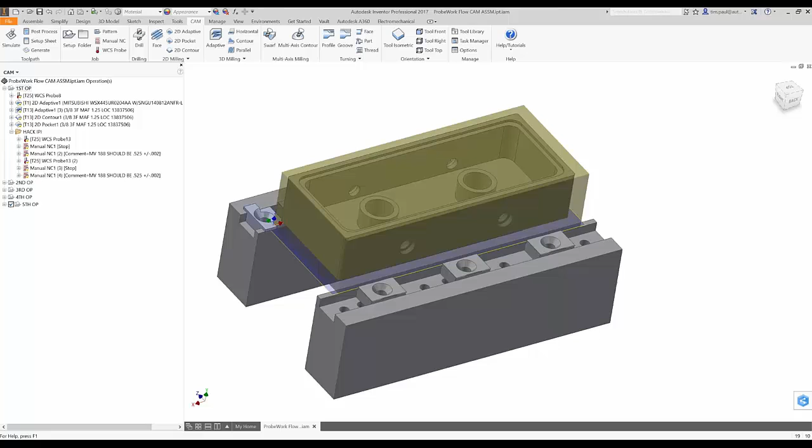Taking a look at the questions here, they want to know in the hack, if the bore is out of tolerance, how is that info outputted back to the operator? And that's from Derek Goodwin, actually one of our partners. Yeah, so Derek's one of our partner resellers. So right now, like I said, it's a hack, and I wanted to show it last so people understood. The value that you're going to be given is just the measurement that it took.

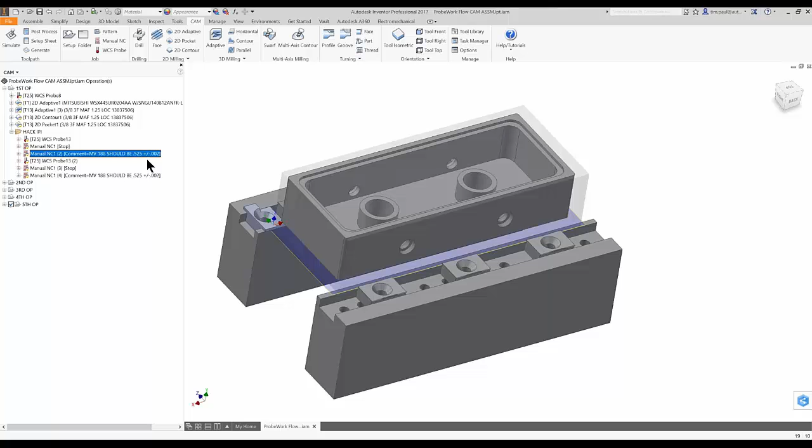You can read in the manual about how to then add logic or intelligence. Derek's from Selway, and your application guys over there do that all day. We just got Angelo, one of our team members. He's made a good living doing that, as well as I.

But right now in our user interface, there's no way to add intelligence. I think that's the right term for it, or logic. But it's something you can kind of hack into it, or just keep an eye out for what we're adding to functionality, and it'll be added there. Hopefully. Unmute myself.

Yeah. So what we have today, effectively, is going to be very similar probing operations, the same type of probing you're doing, but there's many things you might want to do if you probe. If you probe a feature, you really need to start to get into some logic to say, if it's within this tolerance, then go on to this next operation. If it's within this tolerance, update my tool offset and remachine it. If it's in this other tolerance, then the part's scrap and stop doing anything.

So we do start to cross the line into needing some logic around what we do based on what's probed, but we're very aware of it, and we are working towards getting the product there. Yeah, I'll add to that: if you see the probe operation, it wasn't called WCS probing for no reason. That kind of leaves us open to then add other probe names for achieving different functionality.

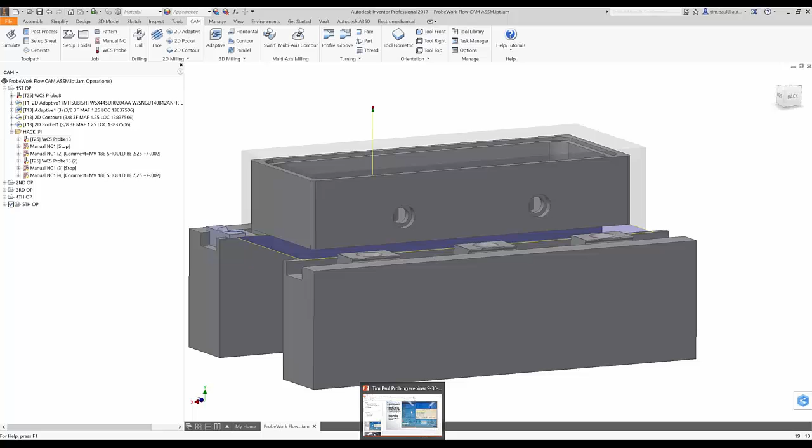probably closer to the end of the year, having it in HSM Works, and then in Inventor how we can dynamically move the planes up and down graphically in the user interface. Those sorts of things are difficult for us to do in SolidWorks, so we do have to come up with a slightly different user interface around how we can make it work in HSM Works.